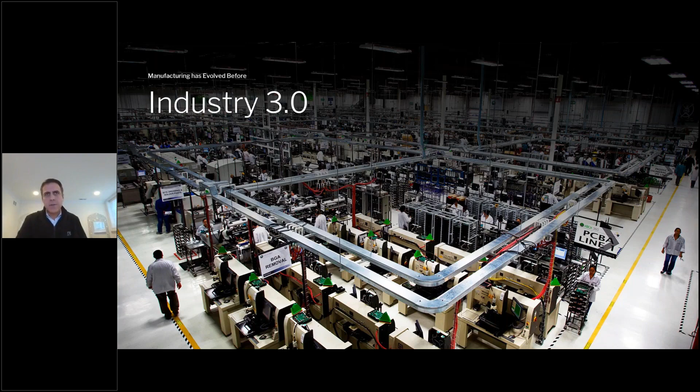And we think that there is a new way as we reflect on this fourth industrial revolution with these new tools at our disposal, and we think we know what's next. We built it at Fast Radius. We call it cloud manufacturing. This is the first of its kind platform for manufacturing innovation that we believe will be as powerful and impactful as the assembly line from a century ago.

This platform includes physical infrastructure to make things in a network of our factories and our partners, an operating system to orchestrate the production and movement of those goods, and then the first of its kind application and services layer to sit on top of that to allow companies to build apps and services powered by a cloud manufacturing infrastructure, just like we have over the last 20 years built this vibrant application ecosystem on top of cloud computing. The same type of thing is now happening in cloud manufacturing, and I'm excited to share a little bit about both the infrastructure in our factories and also the applications being built in this new age.

I'll share an example with you to drive home the point of the promise of this new infrastructure and what's possible. Over the last year, we've all felt the pain in the pandemic of supply chains that have not been able to move fast enough to produce and distribute products to serve the challenge we've all felt. Not enough ventilators back in March, not enough swabs through the summer. So many challenges to scale up production and distribute these critical goods.

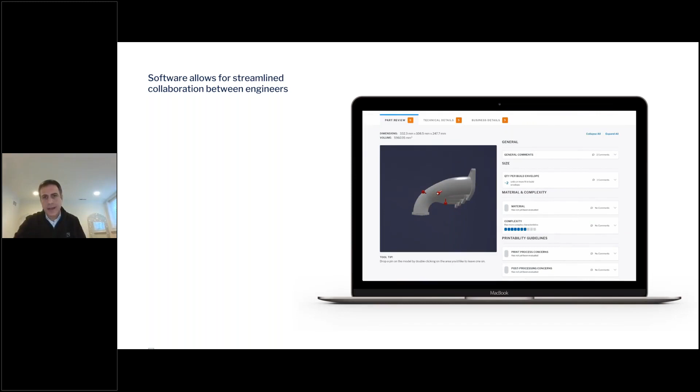When we think about how software powers that, our platform, a cloud manufacturing platform, allows engineers to upload parts. Some of the feedback is automated, and some of it is they can have a conversation with experts on our team and their teams, where they can drop a pin, ask about a feature, get feedback on that feature, creating a modern digital way of engaging in their work.

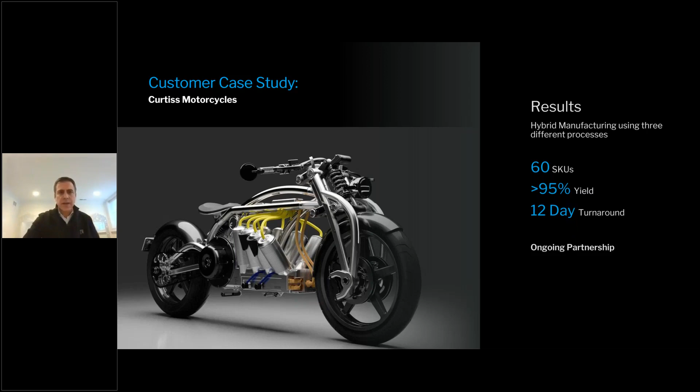A second example we'll share is with Curtiss Motorcycles. They're a pioneering company bringing electric motorcycles to the market. They approached us, not being manufacturing or supply chain experts, but being design and motorcycle experts, looking for a partner that could help them figure out what are the right technologies to embrace, what are the right materials to embrace, and how do we quickly get those scaled into production in a way that the cloud platform enables.

Now we have over 60 components that we're manufacturing that are a part of the bikes that they're bringing up and scaling to market. We're able to help companies like Curtiss move quickly through tools on the cloud, and they include an automated manufacturability check.

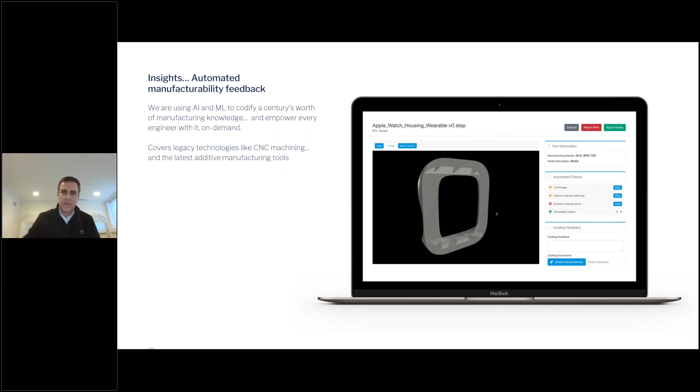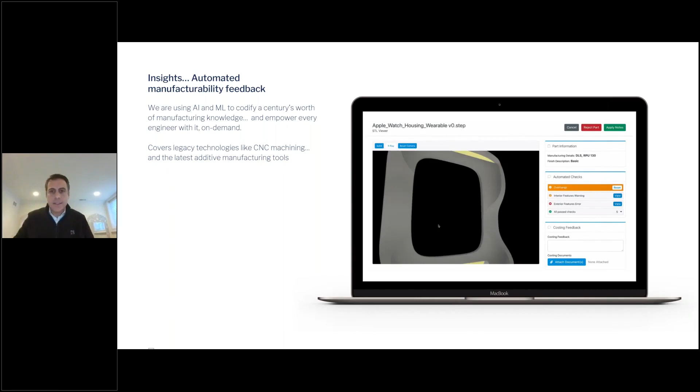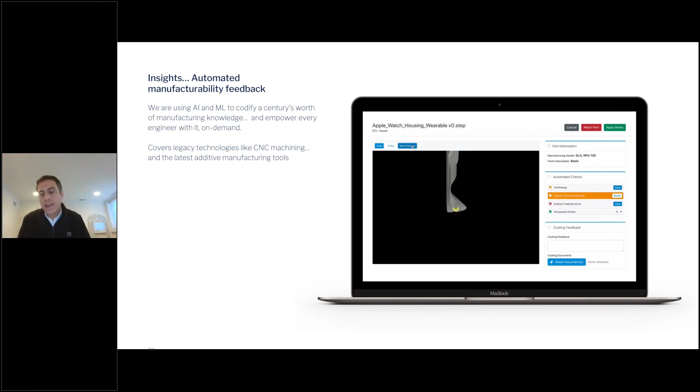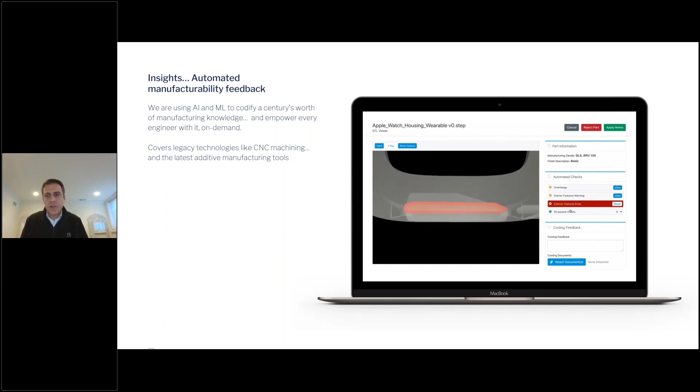The part that you see here, a customer can upload it, and our algorithms deconstruct every component of the geometry and then run it up against design rules. We have a library of rules that gets smarter every day. We're learning from every part that we make, and those design rules then screen the parts and can flag issues on the parts that may make them unmanufacturable or make them at risk in manufacturing. All of that knowledge is codified in our learning engine and shared with our customers in an automated way.

And you think of the power of that. It's a century's worth of manufacturing knowledge that we're now making accessible to every engineer.

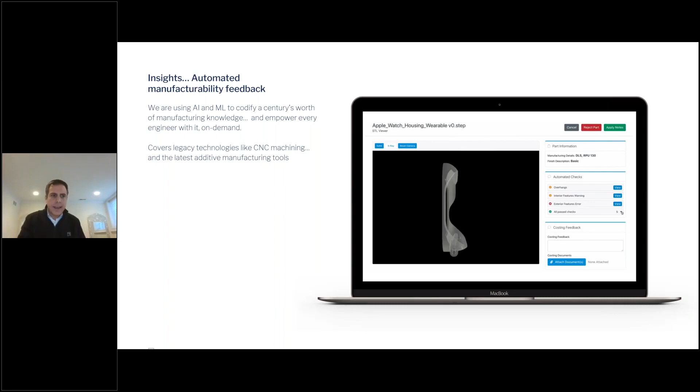Every day it gets smarter and more capable as more technologies, more materials, and our digital thread gets richer and richer. Once you've designed the part, there's a modern e-commerce experience, much like we all love in our consumer lives, where you can go ahead and order your part.

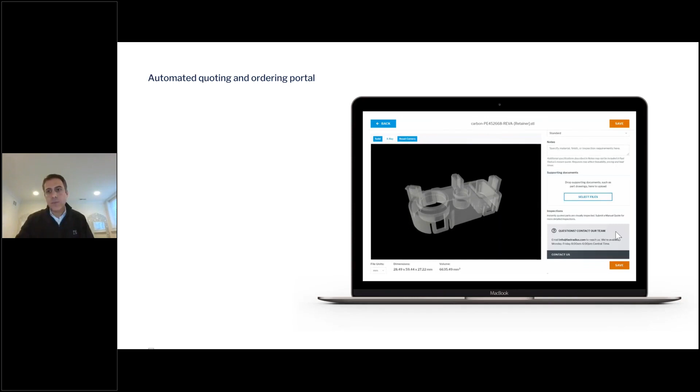You select the technology that you want, the materials, the specifications, the quantities, the shipping address, creating a modern digital experience for manufacturing companies to engage with supply partners. And once this order is placed, it goes into our digital workflow for our factory to start scheduling the work and start making the parts.

I think what's really exciting is to take a look around the corner and say, where will cloud manufacturing take us in the next 5 to 10 years?